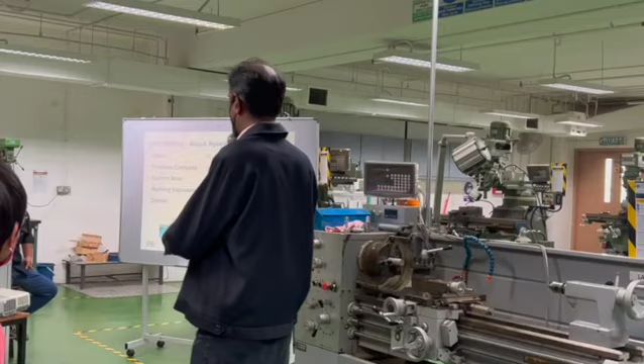I'm a researcher. I have about 19 years of working experience here in Malaysia and overseas. I used to be a safety and health officer, so I've seen these kinds of incidents happen before, in Viking Steel, which stamps the metal chassis of your iPhone, so a lot of potential accidents can happen there. I used to work in Lotus Cars, Lotus Engineering, Proton, and all that as a project manager, engineer, and so on, so quite extensive experience.

Before we start, I want to ask you all, as engineers, always be aware of dangers in the machines that you use and the designs that you see. That's what we're going to talk about today, the machines that you're going to use here. Be aware of the potential danger, something that can happen, something that can injure you, something that can even kill you. So be aware of it.

Just as an example, a motorcycle is a machine, isn't it? Everybody agree? Yeah, okay.

Before using any machinery, do not use it unless the instructor has given you permission. So when you come into the lab, talk to your instructor, Mr. Kiki, and ask whether it's okay to use the machinery. He will instruct you on how to start the machinery and give you proper guidance.

Before we go to safety of the machine, let's understand your lab. You walk into this lab, you see all these signs over there. Do you understand what they mean? It's in English as well, so it's okay.

Blue signages are what you need to follow. There's blue, red, and yellow. Red is what you cannot do, what you're not allowed to do - that's why it's a big no-no. Yellow means be aware, these are things that can happen, so always be aware of the signages. I don't see much yellow over here, so it's okay.

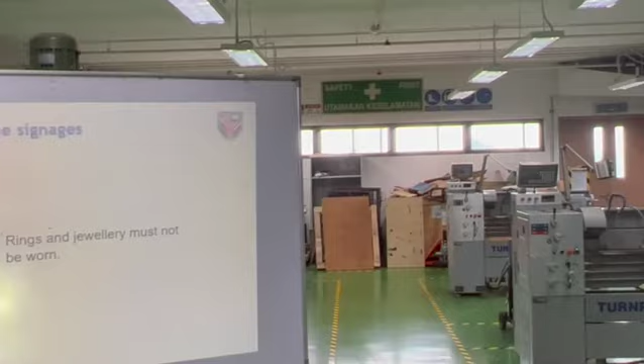Very important: when you're working in the workshop, do not wear your rings. Keep your rings and watch away. I've taken out my watch and my rings. In one of the videos you will see, I forgot to take out my watch - that was my fault. If you have long hair, tie it up, and if you have to use a net, use the net. If the signages say use a hat, please use a hat. Safety hat, please.

This is an apron for welding. So if you need to use an apron for welding, please follow the instructions as well. We will show you soon.

Certain operations you need to use gloves, like arc welding. Certain operations you're not allowed to use gloves - that is why it's a big deal. For lathe and milling, you cannot use gloves because if you do, you might get pulled into the machine and ultimately injure yourself or even lose your finger.

Some operations require breathing protection, especially when you're using the saw, because particles can cut and go to your head. These special masks give you more protection than normal masks. Use a face shield when necessary - sometimes it's called a face mask or face helmet. Please use them when necessary. Ear plugs as well, when you need to use them, sometimes during sawing or welding - use your face mask and ear protection as well.

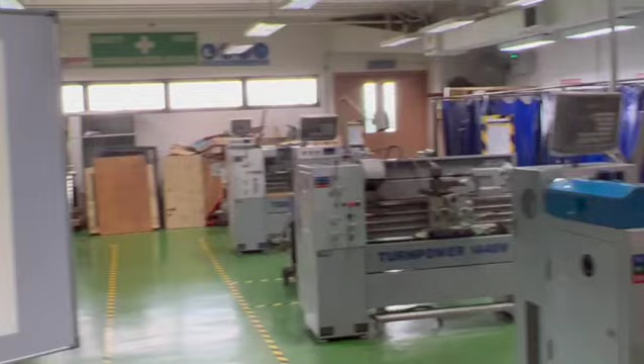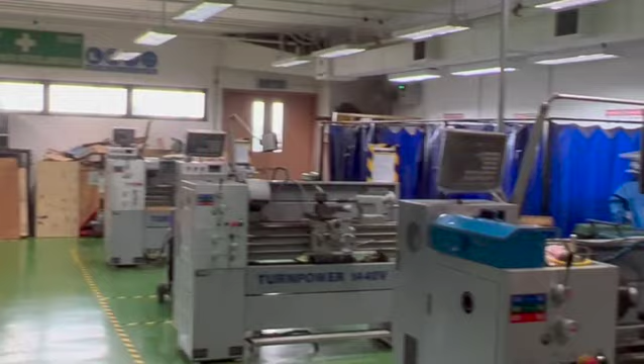Alright, this is important. Certain machines can induce sparks which then cause fire. Like your arc welding, there's a lot of spark there. When you cut metal, there's a lot of sparks as well. Even milling, when you're doing milling, there's a lot of sparks too.

Be aware of where your fire extinguisher is. Does everybody know where the fire extinguisher is now? I was looking at it, so I'm giving you a tip. Yeah, at the back there. Another thing you can do, make sure your fire extinguisher is not out of date, because I think every year it has to be serviced to make sure the pressure and everything is alright. So you can look at the label. If the label says expired, please tell your instructor.

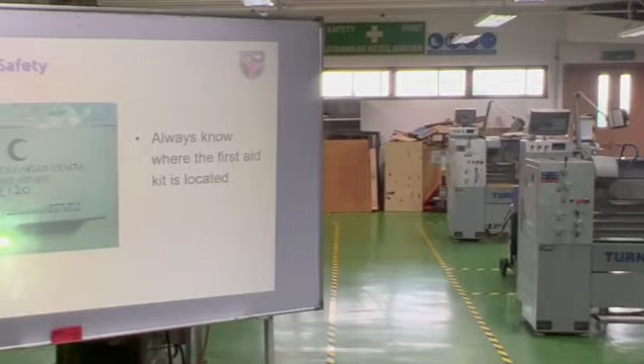Always know where your first aid kit is. Does everybody know where the first aid kit is? Same place, okay, very good. Just make sure you check the items there are not expired. Please try to check and let your instructor know as well.

Okay, in the lab, in the workshop, you have seen the floors. Do you know what the colors green and yellow mean? Green tells you where you're allowed to walk. Yellow is the border, and gray is where the machines are usually stored. Now this lab is slightly different. Everything was painted green, I think, so then it had to be marked in yellow. But usually it's yellow, green, and gray.

Okay, before we go on, I forgot to add two more items here. Do you know where your emergency stop is? Emergency stop button. Okay, that's for your machine, right? But what about the emergency stop for the lab? Yes, you're right, it's over there. Now, just in case, somebody's sleeve gets caught here, do not panic and try to run and turn it off over there. You run there and slam the button. The whole lab will shut off. You have saved the person. So remember that, the emergency switch is very, very important. Anybody shouts, switch it off.

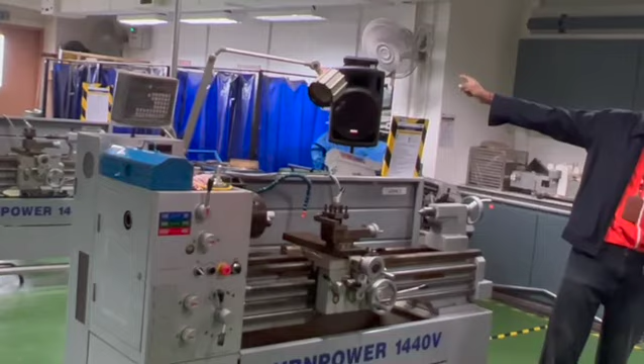It stops everything. Okay, also you need to know where your emergency doors are. Everybody know where the emergency door is? In case something happens, an explosion happens here, where do you run? Yeah, those two doors are your exit doors. Pull means exit. The doors are supposed to be open when you do your workshop. Just make sure, in case anybody had closed it, go and open it. In case you see, you can exit there, fine. But if this machine is the one that catches fire, how are you going to pass it? So always remember, you need to go there.

Also, examples of PPE are here. You can see over here, your hats, your apron, your safety shoes are there. I will show how to use some later.

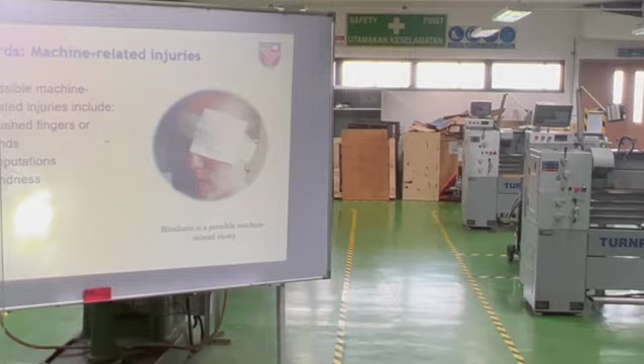I need to ask, is anybody here pregnant? Because some of the pictures I'm going to show are very gory. Are you all okay to see these kinds of pictures? Yeah, you need to see them to be aware.

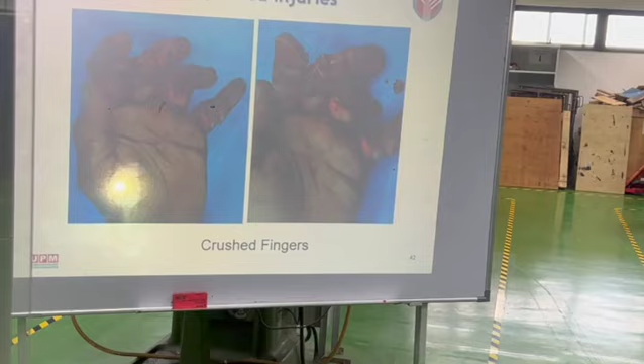This is a crushed finger. Finger getting caught here and getting crushed, going into the machine and getting crushed. Don't think that once your fingers are crushed, after a while you can get it back. That person has lost the ability to use the fingers.

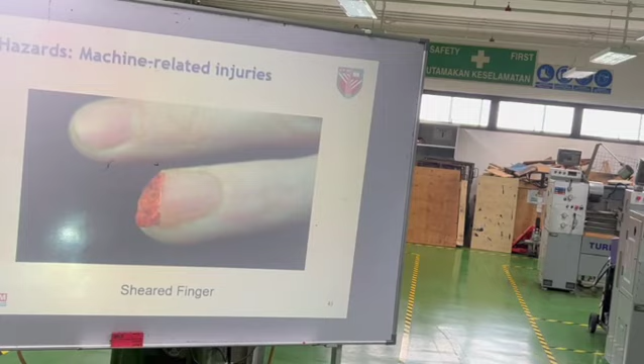This is the finger being cut off, sheared. The finger is still there, but the front part has been sheared. Are you all aware of shearing machines, the one that cuts metal? The worker who has to feed it in, his job is to continuously feed it in. In Daikin, when I was there, the person was working 12 hours, so he got very tired. After 12 hours, when he started putting in the sheet, he did not realize the cutter had come down and he cut off his finger. That was an example of it.

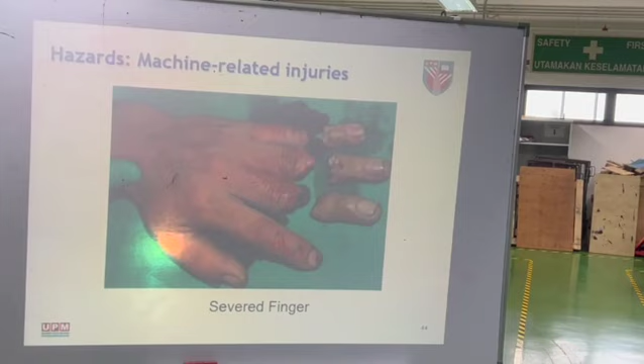This is one where his fingers are completely gone. I think they managed to reattach one, the other three could not. Please be aware of this. These are the kinds of dangers that can happen to you as well.

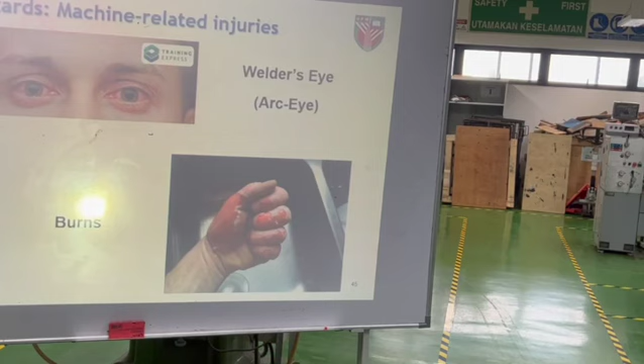This is called welder's eye. If you don't use your welding helmet, it's called a welding helmet or welding mask, same thing. If you don't use the welding helmet properly, this is what can happen. The eyesight is damaged. You can even burn your hand if you don't use the gloves properly.

This is what I was saying about rotating machines. You can get your fingers stuck here, and if you're stuck, it gets into what's called a nip point. Be aware of where the nip points are on this machine - possibly here, when you put in the tailstock, and all that.

So today we're going to talk about three machines: arc welding, lathe, and milling. Before we start, does anybody know what arc welding is? Winding metals together - yes, exactly. Welding two metals together, that is what arc welding is. Basically, that's it.

Just to show you something - you don't have to be scared of welding. Welding is something that a lot of people do. You can be safe when you do it properly. So understand and follow all the warning labels, the instructions that your instructor gives you, and you'll be okay. Don't worry about that, don't get scared of welding. That's what I'm trying to tell you.

Just be aware, welding has got hazards from the fumes, hazard from the electric shock, the arc rays, the lights, the UV ray, noise, explosion, and hot objects. That's very, very dangerous for you as well.

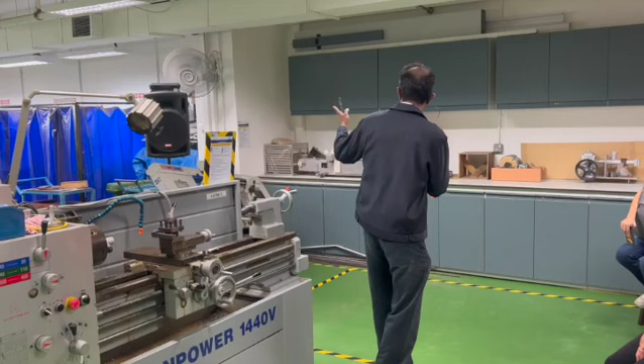The fumes can be very, very dangerous for you. Please remember, according to NIOSH, the Malaysian NIOSH body - National Institute of Occupational Safety and Health - they have done studies on the fume that comes out when you do welding. They found it's not only pure fume, there's also very tiny metal particles as well. If you breathe in those metal particles over the years, you can get cancer. It's not good for you.

So make sure when you set the local exhaust ventilation, it's set properly. I will show you how to do it. Over here, this particular exhaust is set halfway between the nose of the welder and the table. So before the fume can even reach the nose of the welder, the exhaust is really pulling in the fumes. I will show you.

Alright, this is the machine. Always make sure that when you plug in the machine and the cables, the machine is switched off. Now, professional welders - you might see in videos and movies - they do it with the power switched on. They know what to do, but we as amateur welders don't know, right? So keep that in mind - do not switch on and then put in the cables.

If you see a machine with a lockout tag, please do not use that machine. Check with the instructor why the machine has got a tag, then go to another machine.

Alright, this is called the isolator box. You will see the same isolator box over there - when you go inside, later you will see. Now, over the years, this isolator box, because it's made of plastic, has cracked. There's 415 volts running here, 3-phase. If it's cracked, it's dangerous for you - you can get electrocuted. So make sure, if it's cracked, tell your instructor.

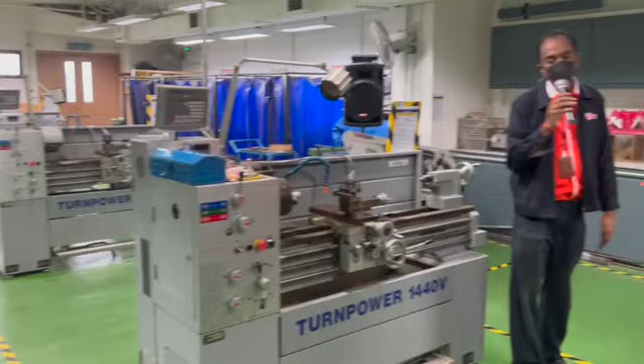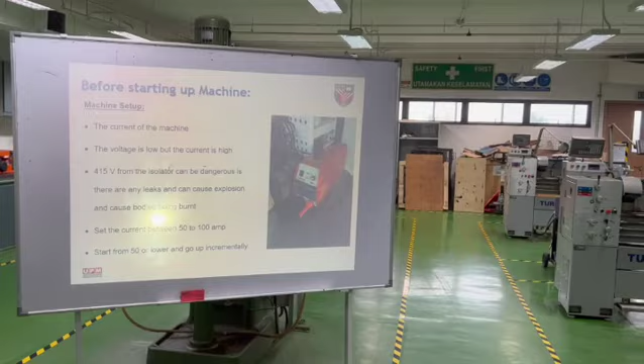Now this is the machine. It's taking 415 volts and converting it to 45 volts. So when you use it, make sure the machine is in proper working condition. If you feel the lights are not coming out properly, or anything wrong with the machine, let the instructor know. For the amperage, always set it to 50 - from 50 you start going up slowly: 60, 70, 80, 90, 100. Don't go above 100 because that's not your level yet.

Okay, this is the cable.

This is your welding cable, from here. It's in proper condition, in good condition. Make sure your welding cable is always in proper working condition - there's no cracks, there's no melting.

If you see any crack, whether on the cable or on the connector - this is the connector, and this is the electrode holder - inform your instructor. Because if the crack is here, then you can get electrocuted as well. Always be aware of that. The crack is here, potentially electrocution as well. It's plastic, so it doesn't last.

Always use protection properly. Use your aprons - the aprons will protect you from sparks. Use your mask, use your welding mask.

Use a mask that you put on your head, not the mask that you hold with your hand. Because if you hold it with your hand, you're using one hand to hold your mask and the other hand to do your welding, so if anything goes wrong and you need to use the other hand, you're stuck.

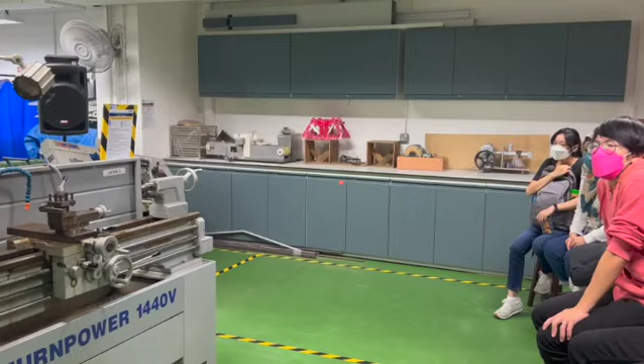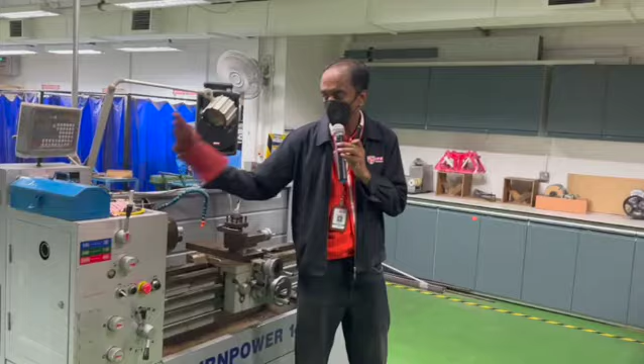All right, this is very important. Does everybody know what this means? Do not use gloves like this and pick it up. Instead, wear your gloves and pick it up. Understand? Because if you think you're getting two layers of protection here, in case it drops, it might actually burn the other part of the hand which is exposed.

Use a plier to hold the hot metal. So welding can be safe when you follow all the proper instructions. Just be aware of the warning label, the material safety data sheet, and you should be okay. Now we'll go and do a demonstration of welding.

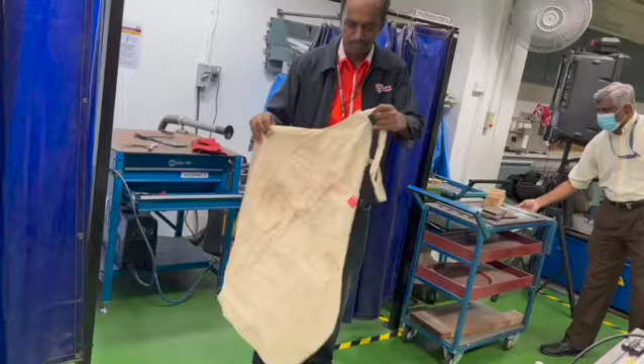Then come here and stand behind this. You are using short sleeves, wear this to protect your arms, and this is your apron. Use your apron properly.

Just a reminder, don't leave your plier on the table because it becomes part of the circuit as well. It becomes very hot. Put it away in the drawer first.

Okay, this is your electrode. In KDU's workshop, you will see it's already connected. So the positive is already here, positive. The negative, earth, goes behind, there's a clamp here. So don't remove that, it's already permanently there. But if you go to any other places you need to remove them, you can remove them.

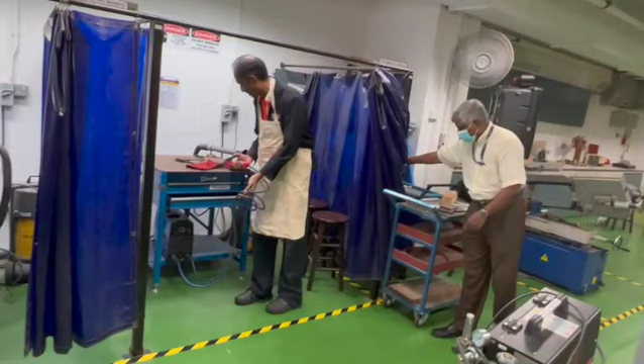Electrode, you will see there's a number, 6013. Does anybody know the meaning of 6013? 6013 is the usual electrode that you use for welding, and this one can be used for most welding. 60 is the maximum pressure allowed, 60,000 psi. 1 is the type of welding that you can do.

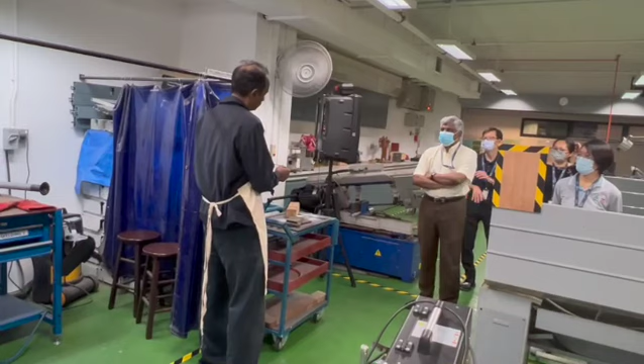I think when you learn welding, you learn basically this one. Downwards is 1, horizontal is 2 I think, upwards is 3, there's something different, circular is another one, 4, and all that. So this one here, you can do everything except upwards. That one you need another one called 7016, if I'm not mistaken. Okay, so this one we will use as the basic.

I just want to show something. These two are the same, can you see the difference here? One of them has a lighter color. Do you know what has happened to this? It's oxidation, yeah, right, oxidation. Now when oxidation happens, your welding process does not go very well. So if you notice it oxidized like this, tell the instructor and he will get you a new one. Alright, and even here the number is already quite blurred, I can't see whether it's 6013 or 6513. So it's just better to be safe.

So I'll turn on the exhaust.

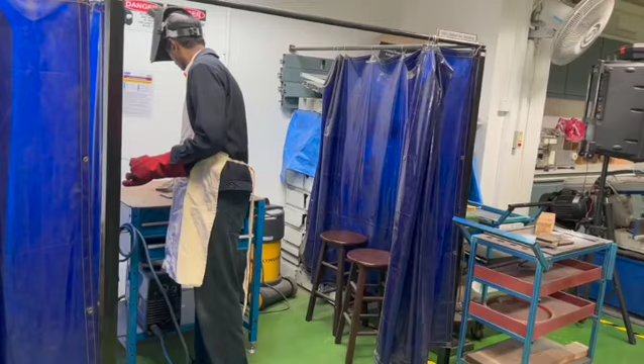Everything with the power off. Let's turn on the power here. Okay, once the electrode is inserted, you go and turn the power on. You don't place it nearby here and all that. Okay, shock, yeah?

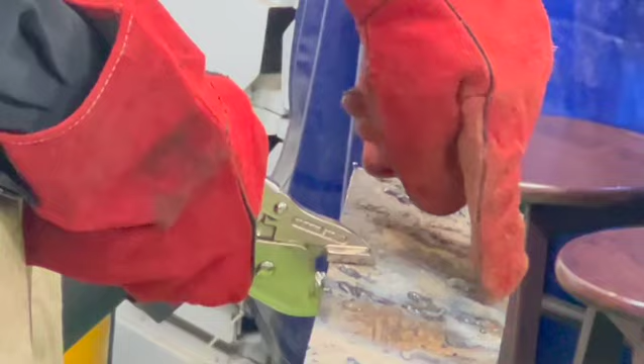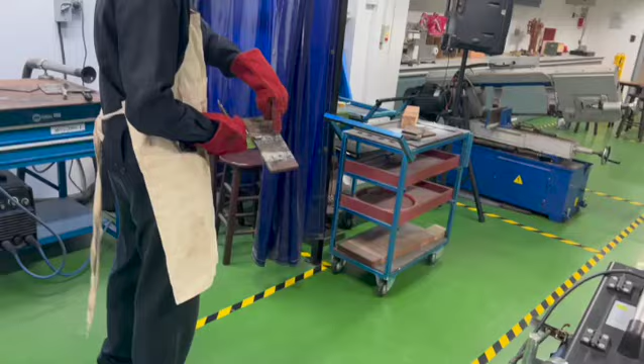You have to knock out the slag, and you need to knock out the slag when it's hot, because it's like malleable, softer.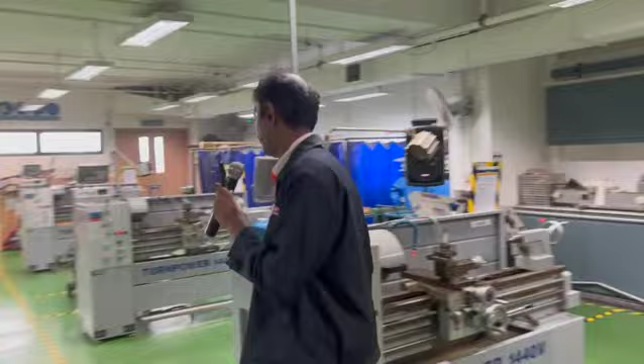Guard open, you cannot start. Guard close. Safety goggles.

So lathe machine is usually used for shaping pieces of metal and other materials as well. You can use for wood as well. It works by rotating the workpiece and getting to the shape that you want. You can see what I've done here using lathe and milling.

Pass it around. Okay, the point of operation is where the work is going to be performed. So the point of operation is always here.

The power transmission is located inside the machine. Always be aware the machine has got electrical power inside it, it can be fatal as well. So be aware where the power transmission is. Know where the on-off button, your emergency stop button, your...

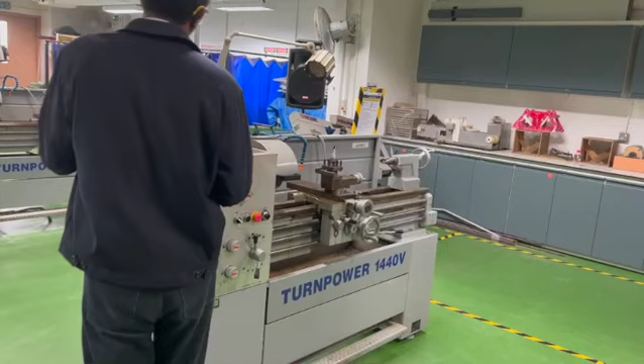Now look at this, you start the machine. Something happens, before you can tell your friend there, it stops. Now this, you can see when you press this part here, this light went off as well. Now when I try to turn it on, I can't.

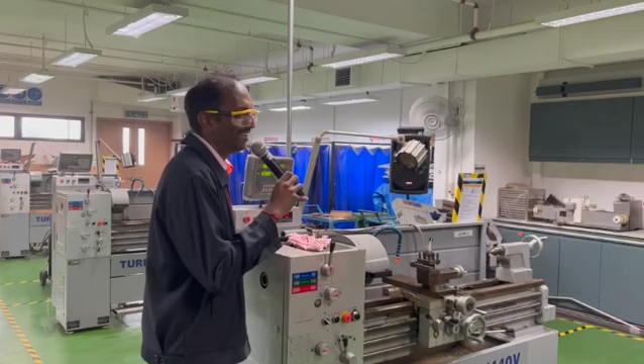Does anybody know why? Yes, because of the emergency plunger here, it has gone in. So you've got to turn it back out. Come out, turn it back on. Then you can work it again.

So be aware of where your control buttons are, what they function and all that. These are the gears. Your instructor, Mr. Fikri, will teach you how to work the gear. Just as an example, when you want to change gear, see, you can't change your gear. You got to work your chuck, move your chuck.

Manage to turn it, but it still might not turn. I'll tell you why. Can you see? It can't turn because it did not engage the gear properly.

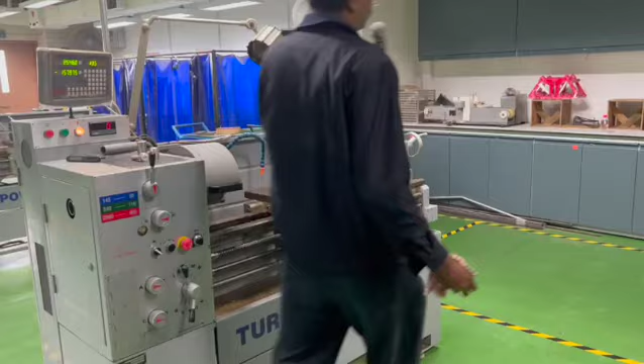Alright, I'll show you more when we do the practical now. Alright.

These are the byproduct of your lathe machine, it's called chips. Now this chip can be very dangerous. During high speed, it can go into your eyes. So be aware, use the goggle properly so that it protects your eyes.

And when the chip is also being cut here, do not use your finger to move the chips away. I'll show you, use a plier or use a metal or use a pen to move your chips away. Never use your finger, you can cut your hand.

Be aware of the safety protection that you need to use. Even though there's a glove symbol there, you are not allowed to use gloves for lathe machines. You know why? It will pull your glove in and pull your hand in together. Yes, that's right, the same, once tie up your hair, do not use jewelry, do not use this. I made a mistake, I should have taken this out.

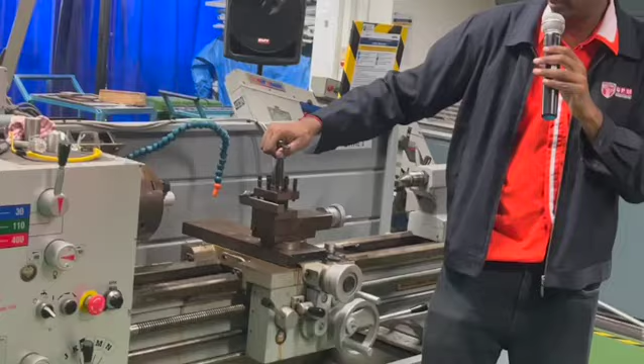Now this is called a chuck key. You use this to open the chuck to put in your workpiece. Don't forget and leave your chuck key here. This has got a guard, it can't move without the guard being closed, or you'll hit it here. This is to open up your tools, this key. This is important, do not leave it here as well. If it's here, it might get loose. You loosen your tool bit, the tool bit might jump and hit you back. You can even cut your eyes or whatever, so be careful about it.

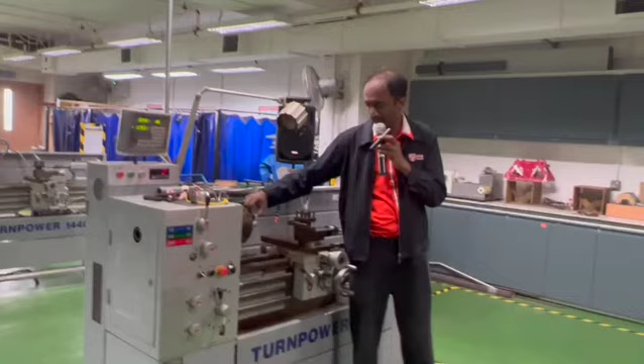Make sure that your work is supported solidly. Supported means it's holding here. Inside this chuck, there's 4 or 5 teeth. Make sure that you use at least 3 teeth to hold your item. If you put it on with only 2 teeth, it's going to fall off. Make sure that your part that you're working on is not too long. If it's too long, when you're cutting, it might actually break. So there's a certain limit here, there's a formula. I think your instructors or lecturers will tell you how long you can use.

So like what you saw in the picture earlier, do not reach around the cutting tool to remove chips. Use your emergency stop button when something happens, and turn off the spindle when you want to make any change. Do not let the spindle run, you might think you can do it, but nobody is superhuman, so do not do it. Beware of rotating parts, it can injure you. Do not use gloves for this, please.

Be aware of these tags, these are called lockout tags. So far all the machines here are working in proper condition, so there's no lockout tag. If you see this tag, then do not operate the machine, ask your instructor.

Alright, I will show you how to use this safely. I think maybe you want to gather around me over here.

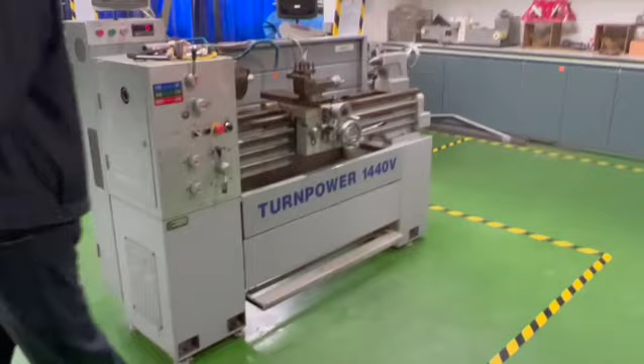I'm going to open this one. The production, I'm wearing my goggles here. No watch, no chain, no metric card, nothing. Then this can be good.

I forgot to mention, the material we're cutting is aluminium. Aluminium is soft, so it will be easier to cut with the cutter. Usually when you use bare metal, it's going to induce a lot of sparks on top of the chips, and the chips will be hot as well, so you will need to use your coolant. The coolant is normally made from car coolant, that would be one option. There's also vegetable oil, which is safer, but more expensive because it's a special vegetable oil, not the one you buy at the supermarket. For this particular one, we don't need the coolant because we're using aluminium, so we'll cut without the coolant. You turn on the coolant here, then you are able to bring the coolant in.

Okay, this is secured, this is secured. This is the tailstock. You want to make sure that your cutter is dead center, this is called top dead center. This thing here should meet the middle, so your top dead center is here. Perfect, make sure your cutter is also here, so we just check.

Here, center, right? Bring your cutter close before you start. Okay, almost ready. I'm going to start the machine up.

You all want to see how it's done? Just be aware it might fly, so stay outside the work area. Light material, very light material, might fly here, just in case.

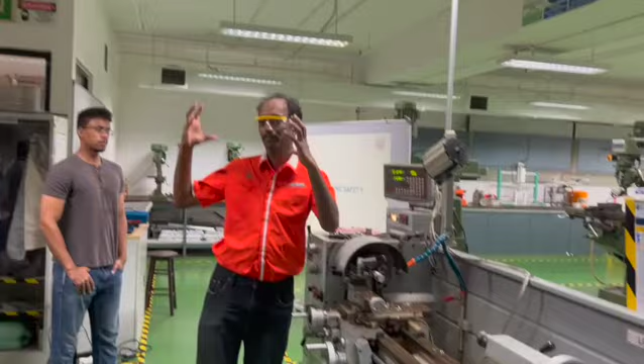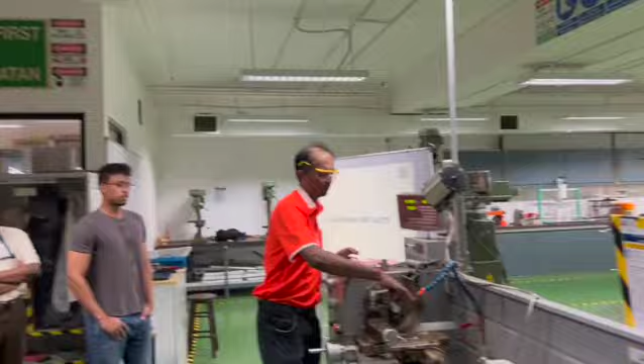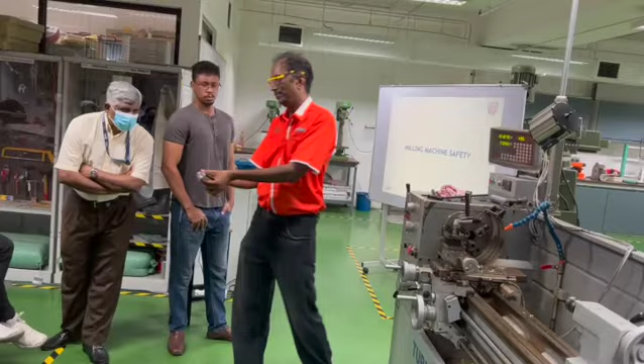Processing. This is the reason it's a bit rough because I moved the cutter fast. You need a bit more patience to be very smooth. Get that, yeah? See? Very smooth, yeah? Smoother, not perfect, but smoother.

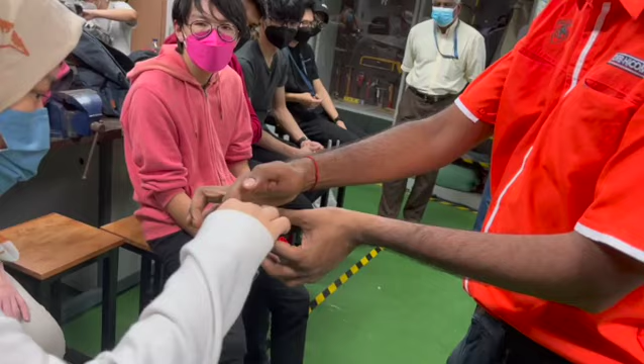So maybe a couple other reasons the cutter was not sharp enough. It's rough, yeah, rough. It's hot, I will leave it there later. You can see.

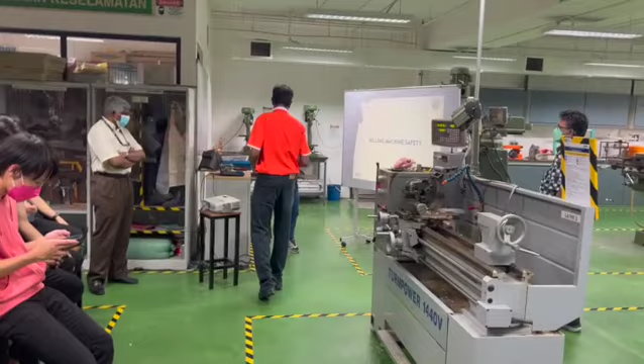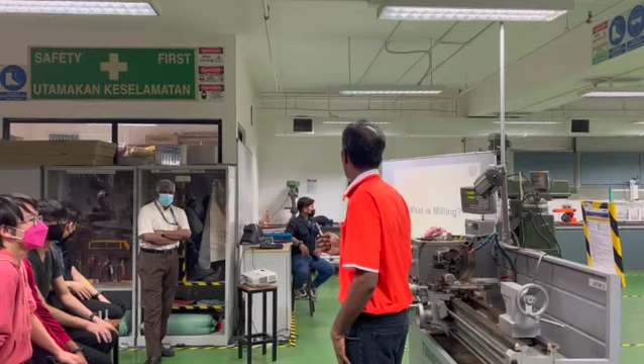Milling machine safety. What is milling? Yeah, a form of cutting. Milling is a form of finishing, surfacing of a product that you are working on. It can be square, it can be cylindrical. It's not as limited as this; it has to be cylindrical.

Yeah, this, your workpiece is rotating. Your workpiece is moving. There, your tool is moving. Here, your tool is stationary. This is the tool, it's stationary, right? There, your tool is moving. Yeah.

I want to show you this. Here, you can put in a drill bit here as well. You put in a drill bit here, you move it there, you are able to make a hole in the item as well. So the drill bit is stationary, so the product is the one that is moving, your item is the one that is moving. Over there, your item is stationary, your tool is the one that is moving, yeah?

Alright, same thing, protect your eyes, tie up the loose hair, do not get caught in moving parts. Always take out the rings, matric card as well, all that. Wear safety shoes, coming to lab, need to wear safety shoes. Safety shoes are not expensive, about 40, 45 ringgit, able to get one, yeah. So, always use safety shoes. It protects your feet, there is a metal inside here. It protects your toes, so worthwhile investment.

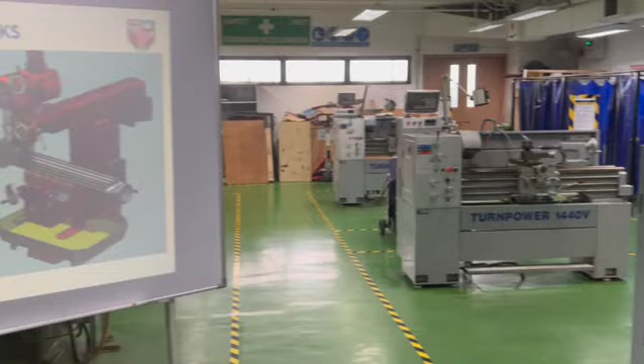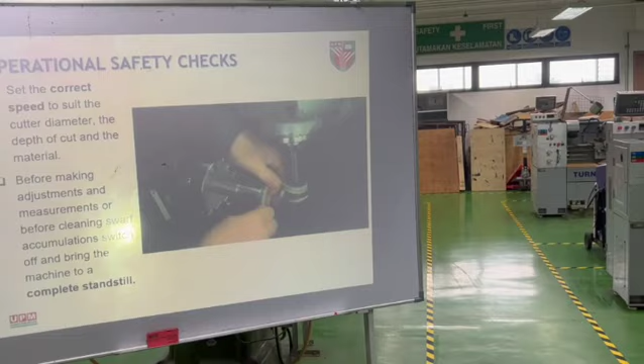Always set the correct speed. Look at what this guy is doing - he started the cutter manually.

Apparently, back in the old days, if the switch did not work, they gave you the option to start the cutter manually like that. But please do not do that. It's very dangerous - you see how close the finger is to the cutter. Something unwanted could happen. Always be aware of that.

Set the correct speed - there are formulas. This is very important for the milling machine. You have to learn the formula and set it before you start the machine, because each material and the type of thing you want to do - cutting a nut is a different speed, cutting a gear like this is a different speed. The materials and so on all require different speeds. Understand the formula - it's not difficult, it's quite basic, 40 over n or something. Your lecturer will advise you on that.

Once again, before starting, ensure that the guarding is on and all the proper parts are in place. Know where your on-off button is, and know where your emergency switch off is.

Always make sure that your chuck is properly tightened. This is the chuck. In that machine you won't see a chuck because it is removed, but in the milling machine you can have a chuck as well to cut gear. This is cutting gear using the chuck.

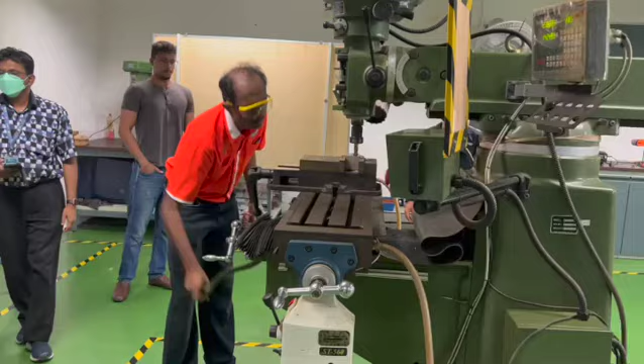Okay, I will now demonstrate the last machine for you, the milling machine. This handle here moves it horizontally.

Move it back here. You want to get even speed of cutting, or you get steps and break the tool - use it manually. I would prefer still manually. If you're confident, use the automatic one.

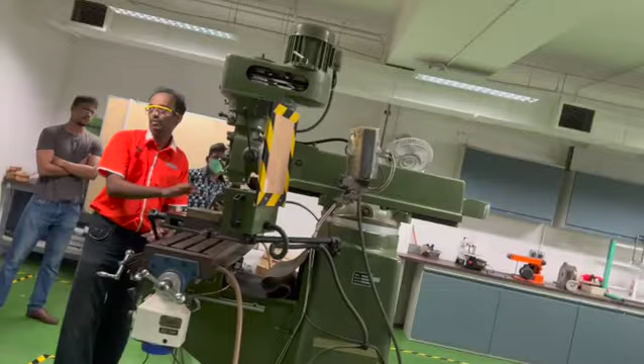This is the vice to clamp your workpiece. Make sure it's very tight. Now watch this - this lifts the table, lifts the bed, so that you can get as close to your workpiece as possible. So I'm not getting close. Do not let the workpiece touch your tool.

But just so that you know, it's safer to take it off from here. It's a safety mechanism. So once you have pushed it in and raised it high enough, take it out, because in case you move it up while it's running, you might break the tool or damage your workpiece.

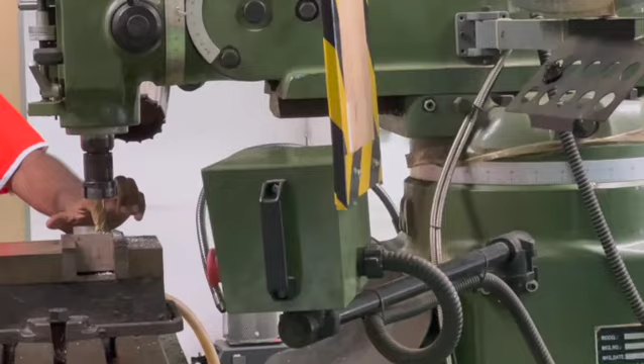We've got it close enough. Now there's the depth that you want to cut it. You want to face - there's a depth, how deep do you want to cut it. Normally we go 0.2, 0.3, 0.4 each increment, and then only we go up to the number that you want.

Let's say you want to cut 1 millimeter. Do not go immediately to 1 millimeter. Go 0.2, shave it off. Go another 0.2, shave it off. Where do you see the 0.2? Over here.

You now set this as 0. And then we raise it up. We move it using this 0.2. Then we start the cutter.

Do you want to come and see this measurement tool first before I start? Raise it up to 0.2.

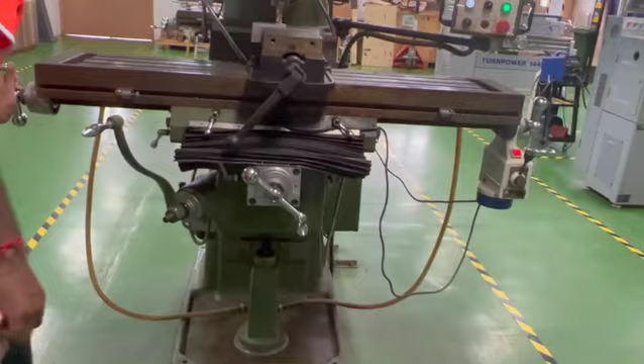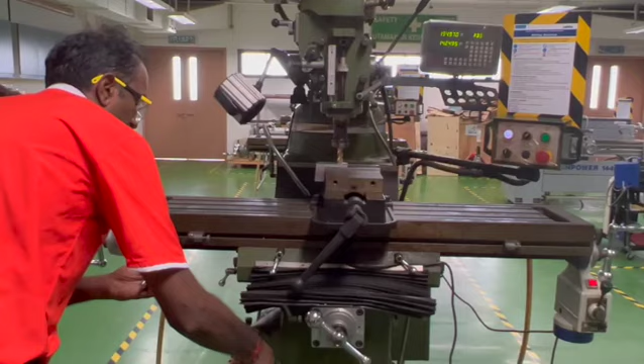Okay, to turn the spindle, this is where you turn the spindle.

If something goes wrong, switch it off here. Now please be aware, I'm going to ask one of you to switch off the emergency. Now, when I say emergency, when do you switch it off? So be aware, when I tell you emergency, yeah?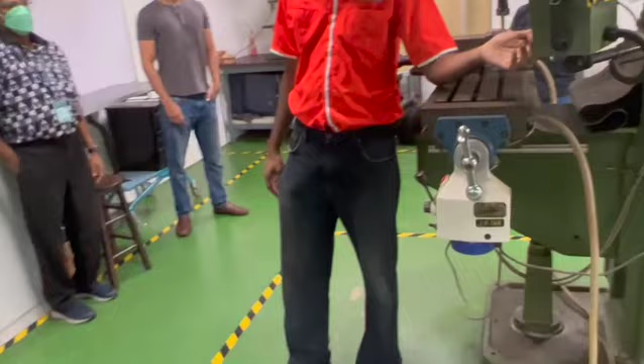Now, once again, because I switched it off, this button went inside. You try to turn it back, it won't turn on. Pull it out, pull it out.

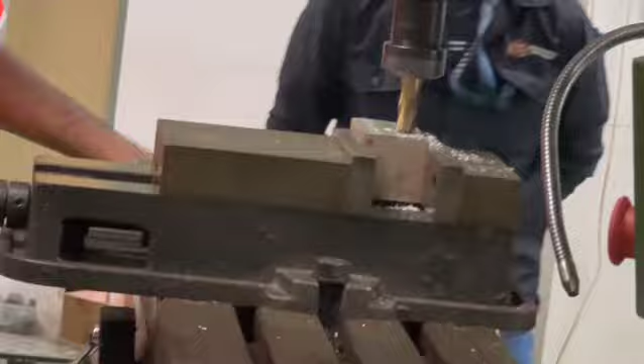Can you see it? Okay.

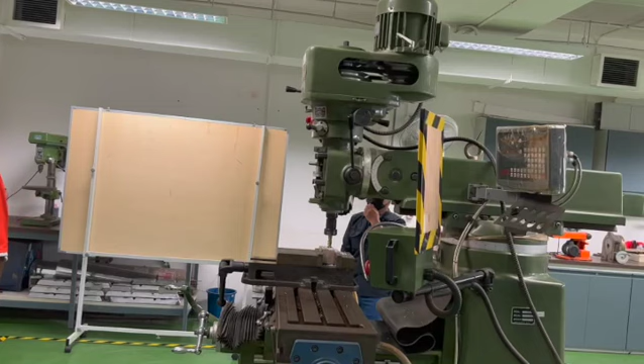Okay, emergency - switch off. Yeah, yours should run. Okay, now I can't start it up again. You need to pull it up.